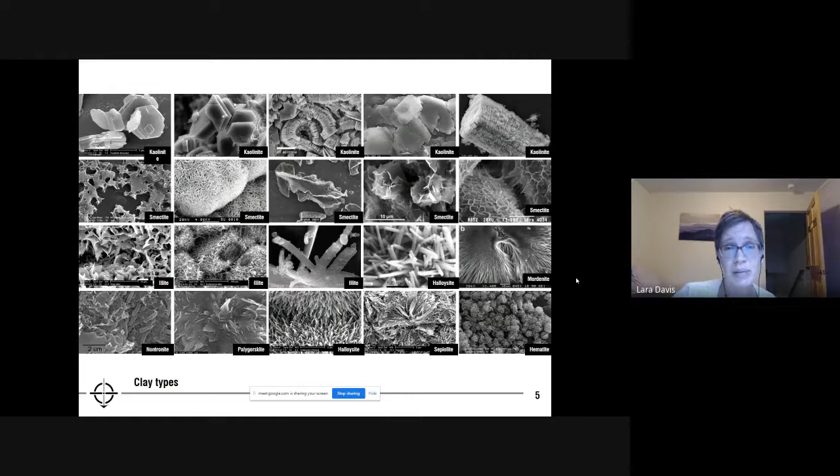So just a little bit more on the material. If we take 1 cubic meter of rammed earth wall, we have more than 600,000 trillion grains. And yet we only need a quarter of a liter of water to serve as a binder in order to make a loose earth into a building material. And that's without even needing any cement.

But we can use raw earth in and of itself alone, like we see with the adobes on the left, or we can stabilize earth and compress it like we often do at the Earth Institute in Auroville with a very small percentage, only 5% cement, in order to serve as a building material even in very, very difficult climates, in tropical monsoon climates like Auroville.

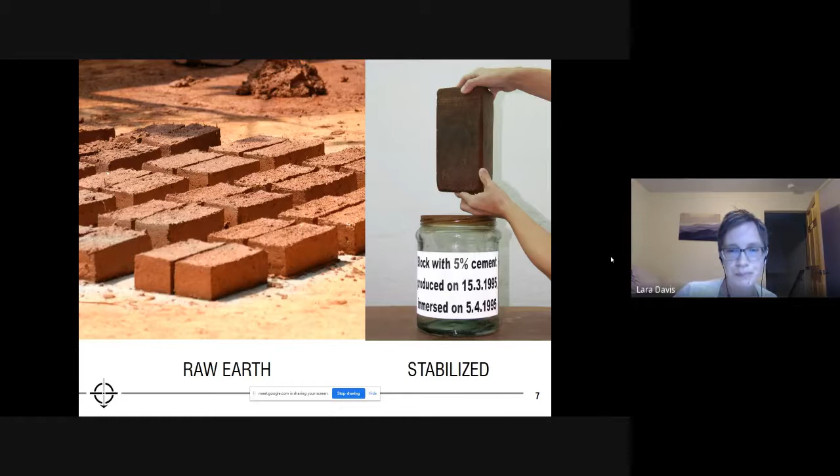So just to give you an idea of the overall language, there are 12 different vernacular earth construction techniques and 14 total earthen construction techniques that we can actually use today. And we spend a lot of time drawing from the vernacular or local traditions in order to ask the question of what are the best low-cost construction techniques for a given location in the future.

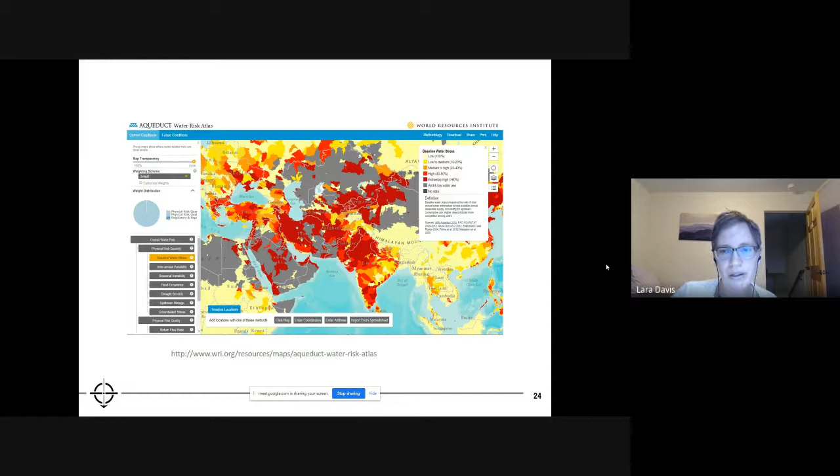But to keep all of this really important arable soil, or humusy soils, from being lost in large rivers of red runoff to the sea. And keeping in mind that India at large is one of the red hot zones in the world of water risk. And even when we zoom into India alone, Tamil Nadu is in the very reddest area of extremely high water stress.

And that's been one of the real wins of the pioneering years. While there is a system of local tanks that were built up thousands of years ago to retain the water, so critical in this climate, a lot of these tanks are no longer in use. And the work of the pioneers was really to begin to shape, again, sculpt the landscape, sculpt the soil to be able to retain water, to repercolate it and recharge really stressed local water aquifers and the water table.

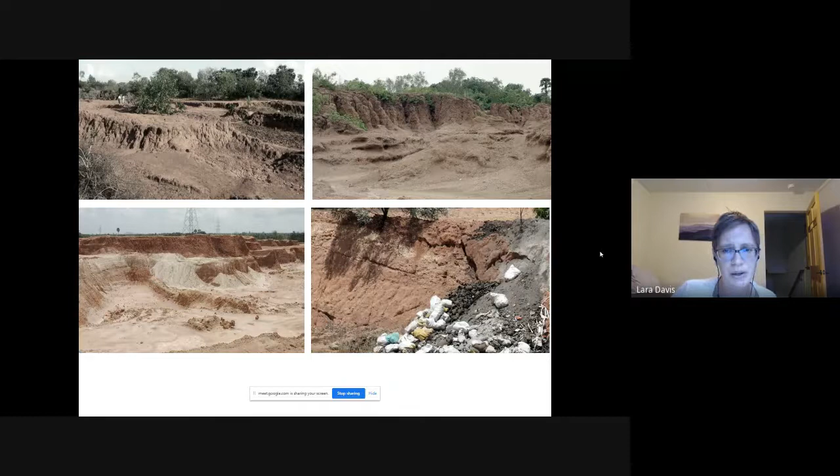So we still see, in a present context, areas like this where we have quarrying of soil for roads, and loss of arable soil to the sea, a lot of erosion and what's called desertification. It's loss of arable soil. But we have this opportunity in basically every moment of development to ask, what can this excavated soil be used for? And by excavating local soil, how can we shift and shape the local ecology?

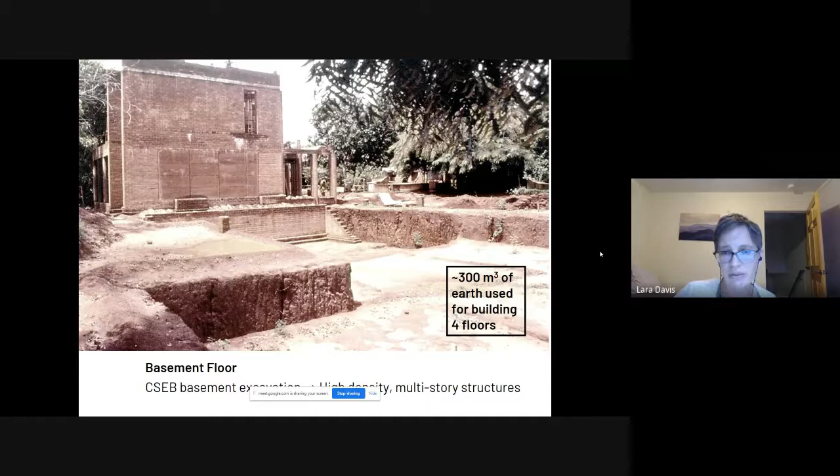This is just an example of how soil can be excavated for building, or, in this case, decentralized wastewater treatment systems, sustainable infrastructure, basically. Or, you can't see it here, but all of this has been shaped for sand pits for rapid water repercolation to the aquifers.

And as I mentioned, in Auroville, we have this incredible case study of basically 52 years worth of reforestation using the local tropical dry evergreen forest typology, and basically recreating a local biodiversity which had been at risk for many decades since the beginning years of colonization. So in Auroville today, we have this lush landscape with this beautiful South Indian tropical evergreen forest, and this really did not exist at the beginning of Auroville.

So I want to show you just quickly a few different pioneering projects of using earth as a building material, and many of you know Poppo Pingel, who worked in village construction with rammed earth with affordable housing in the early years. And this is quite similar to some of the traditional village construction, which I must say is one of the best bioclimatic building typologies of the climate still to this day. And I hope that before some of these techniques are completely lost, people start to realize how ideal they are for human comfort in such a hot and humid climate as Auroville.

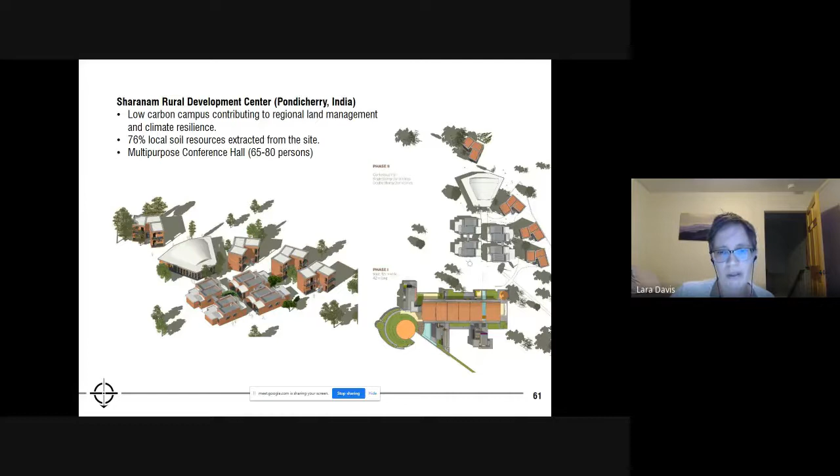And I'll zoom in a little bit further. Now we're at the architectural scale to show a conference hall that we built. But first, to give you an idea of just how much soil was moved on the site. Here, the JCB is loading up a tractor in one of these very large soil percolation pits that were incorporated into the landscape. Basically, by excavating all of the soil, we could use it maximally for construction on the campus and shape the landscape to be able to retain all of this water at the top of the watershed for crucial resilience of the water table in the state of Pondicherry.

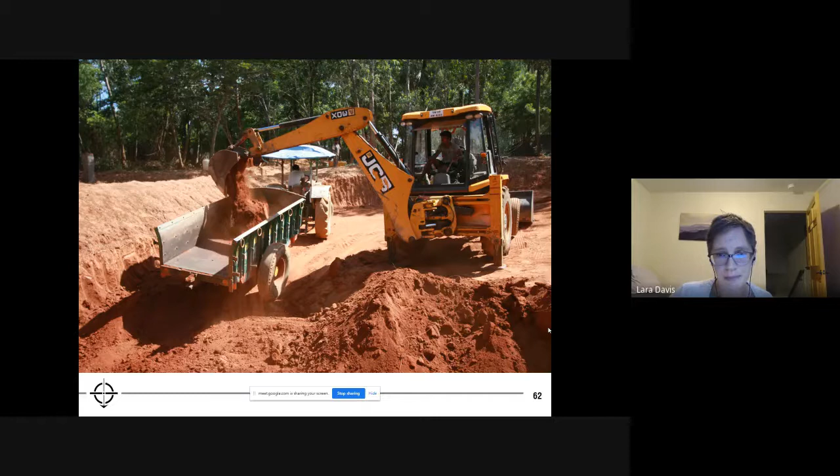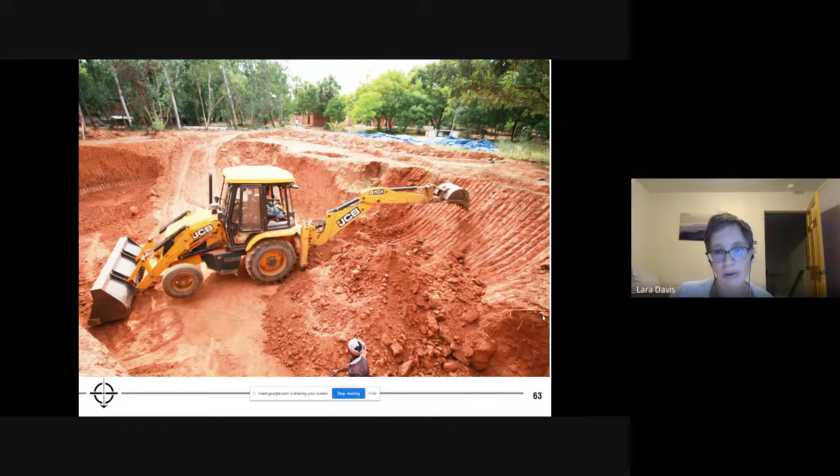Another view. So it's quite a large mass of soil that was excavated on this site from what had been a very poorly quarried area to bring it back, as Auroville had been brought back from a denuded landscape into a lush green landscape where all of the rainwater in the monsoon season is restored to the aquifer.

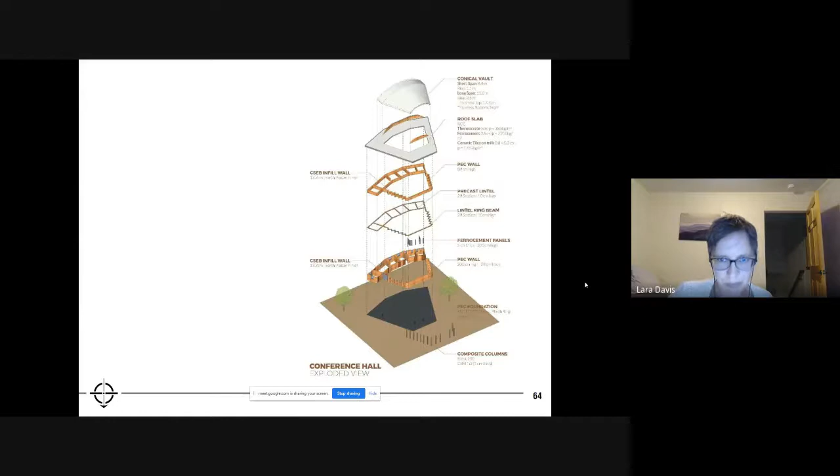And the conference hall is basically using poured earth technology developed in the last 10 years at the Earth Institute, which is very rapid to cast, but it uses a large percentage of soil and some stabilizer for load-bearing walls. And the special thing about this building was that we had a conical vault of 15-meter span. In feet, it's a 49-foot span with a minimum thickness of about 7 inches.

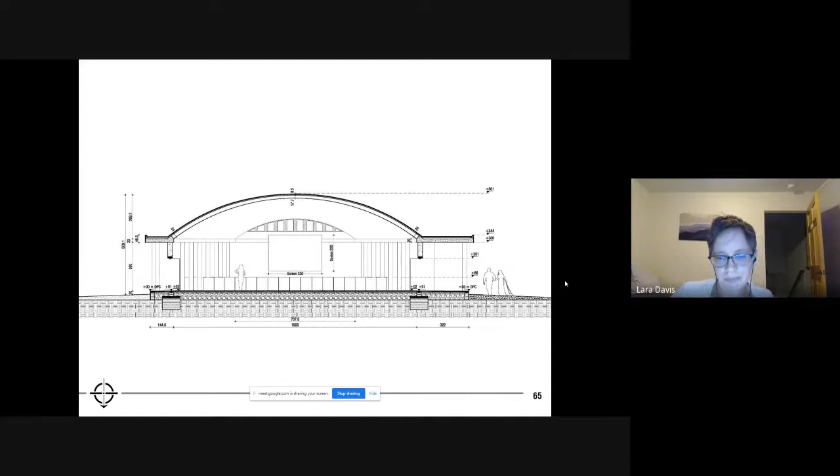So that's a fully load-bearing masonry building with the use of CSEB, or compressed stabilized earth block, for the vault. And again, the special technology called poured earth, which is the superstructure. So it's basically like a low strength concrete, but it's high strength enough that we could carry about 85 tons worth of roof system on top. So it's low strength for concrete, but totally sufficient for multi-story construction.

And it's basically like classic concrete, except we use a very small amount of cement and lime and the most amount of earth possible. So I think the carbon impact of this is about a quarter of the emissions impact that it would have been if it was a concrete wall.

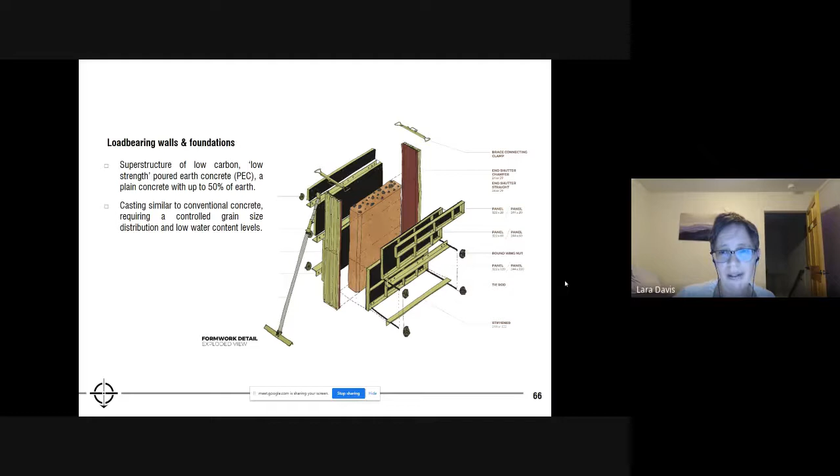And this was the special part of the construction. We built this conical vault, which had a maximum of 49-foot span in the free-spanning technique, which is something coined by the Earth Institute and in fact developed by the Earth Institute out of a similarity to the Nubian vault construction technique, initially from Egypt. So in this technique, basically we have earth block, which is laid vertically with a stabilized earth mortar. So we don't need any formwork under the structure.

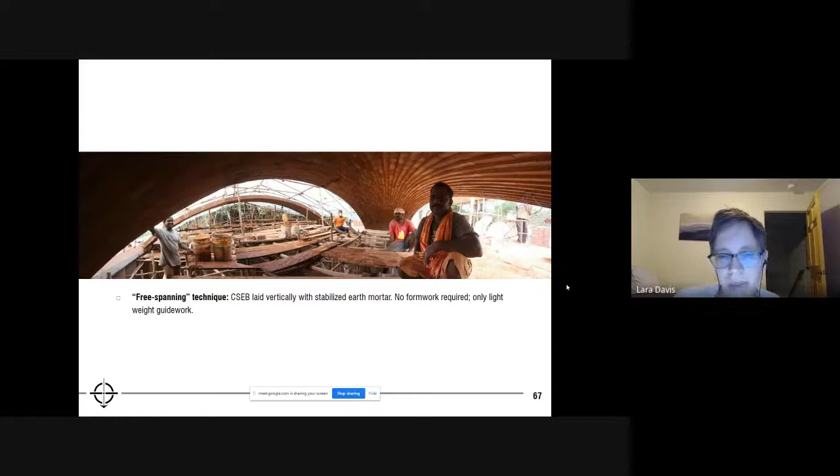You can see that this vault is being built. The masons are sitting below after a long day of work, where there's no formwork at all, only scaffolding for the masons to stand on and build. And only a series of mason's lines or string lines that are pulled from one side to the other to tell the mason where to lay the block.

And this is actually significant in the sense that this is one of the largest span single curve earthen vaults in the world. To my knowledge, it is the largest single span earthen vault in the world. And at the beginning, when we laid up the first arch of the course, it was 49 foot in span and only 2 inches in thickness. So it was really quite an endeavor.

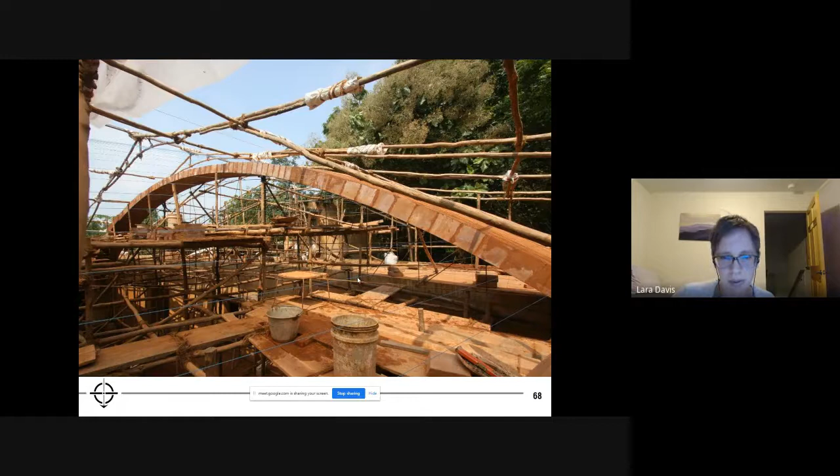So here you see the earth block is basically being glued to the surface, and it can only be glued to the surface like this with no supporting formwork because of the special properties of soil we talked about before, the use of the clay, which gives a capillary suction, and once it's set, then you use the electrostatic bonding capacity of the earth to just glue the blocks onto the surface.

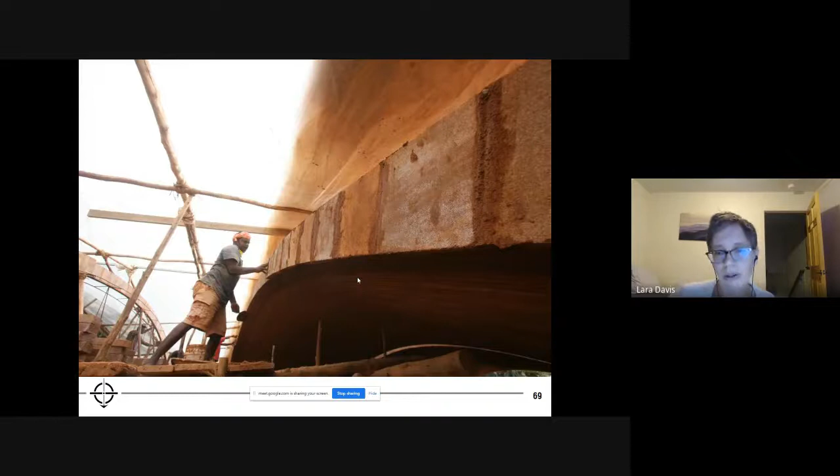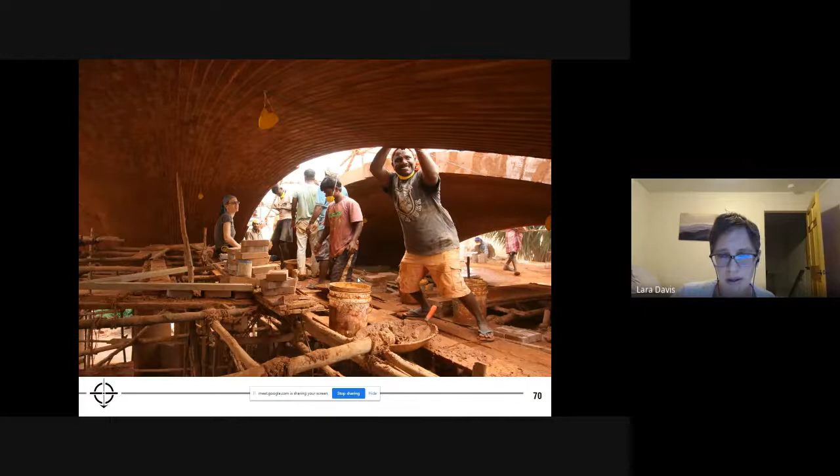And actually, it's pretty rapid. This whole vault, I forgot the square meters of the surface, but quite a large vault was built over a period of about 5 weeks.

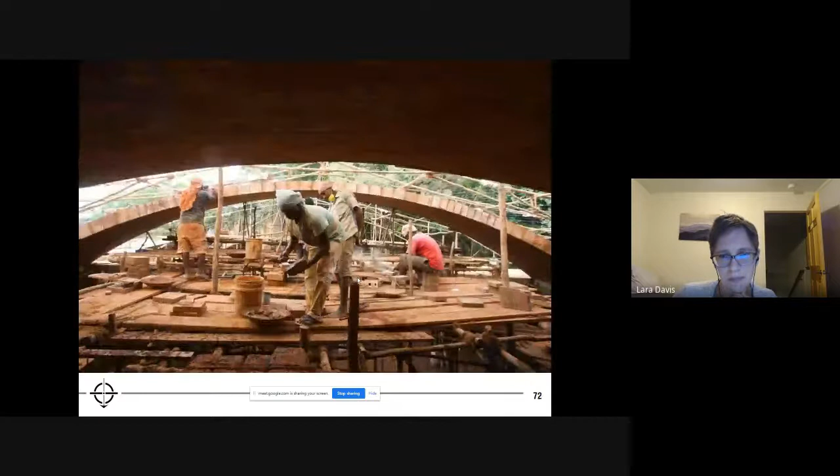So, I've zoomed around to different scales here when talking about the kind of karma yoga of construction with earth. We're back at the building scale again, but we like to, at the Earth Institute, look at different scales. The scale of the material itself, the scale of the building, the scale of the overall site, the scale of the entire ecosystem of that particular area.

And by looking at different scales, we can ask ourselves, well, when we work at the material scale, it's very small like this, can we make decisions that impact a whole local ecology, that improve a whole local ecology to address not only, for instance, in this case, a very denuded site from excess quarrying, but how can we improve it for the long duration of the needs of that particular region?